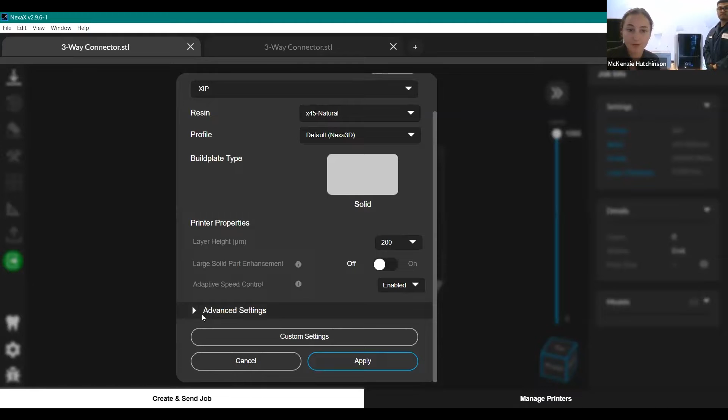Whether you have the Pro version or the basic version of the software, you are going to see this screen. With the Pro or with the basic version, you also have access to some advanced settings right here. So you do have some controls. With that, you have your type of base layer, wait time, and exposure settings. This is good for general use of the printers, in addition to if you're planning on just printing our validated materials at our validated layer heights.

However, if you are looking to print third-party materials or different layer heights, or just get a little bit more into the advanced settings, you have access to custom settings right here with the Pro version of the software. So once I'm happy with all of the settings that I have set, I'm going to go ahead and click apply right here. And it's going to bring me into this interface.

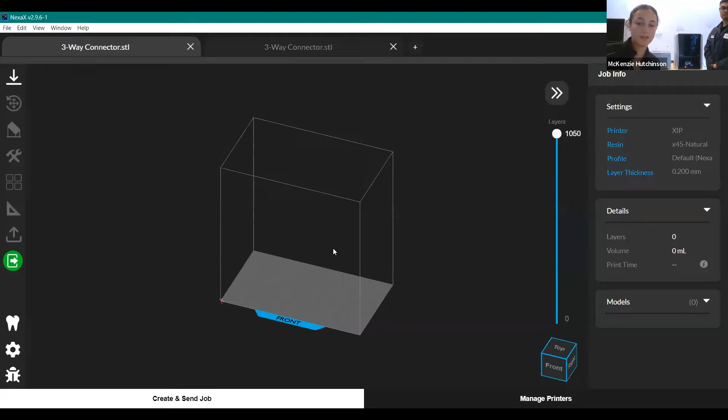So before I can do anything, I need to import my part. As I mentioned, today we are doing a three-way connector print, so that's what I'm going to go ahead and bring in. When you import a model, you have the option to import an STL, OBJ, or 3MF. I typically tend to work with STL, so I'm going to go ahead and click on that.

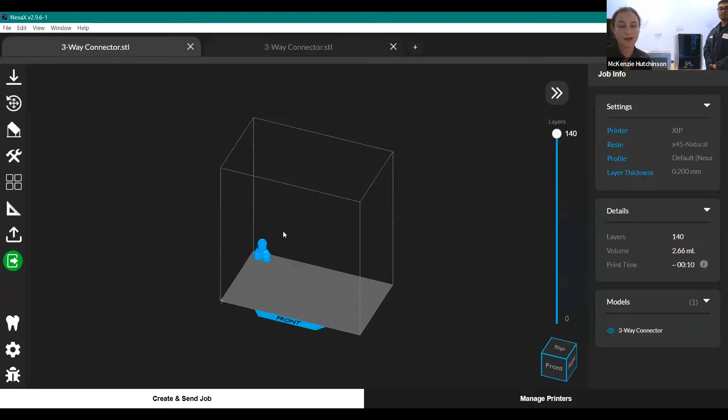And then as you saw on that screen below, it's going to be checking for water tightness. This means that it's going to be checking to make sure that your mesh is intact and ready to print, so there are no holes, flipped triangles, or corrupted mesh. If that was the case, then it would give you the option to repair with the Pro version of the software. So once you're here, you're going to have your part, as you can see right here.

With that, you have some basic transform tools with free translate and also set numbers, along with rotation and scaling. These are also hotkeys here. So let's say you have a workflow and you want to move very quickly, you can do so just by switching quickly with hotkeys. Also, let's say you export your part out of your CAD software with the wrong dimensions, you can modify it here as well. As you can see here, that's going to change it between inches and millimeters.

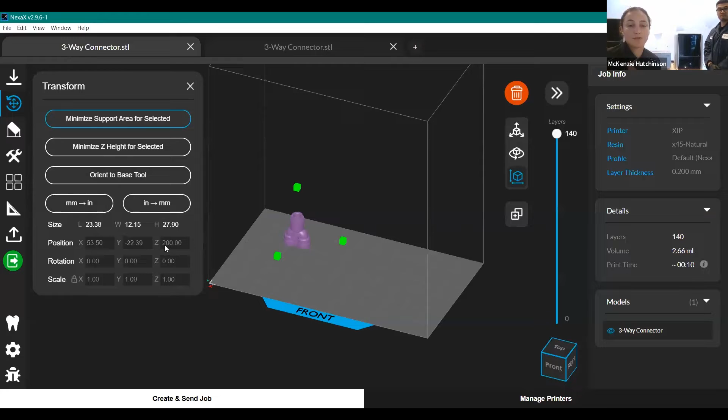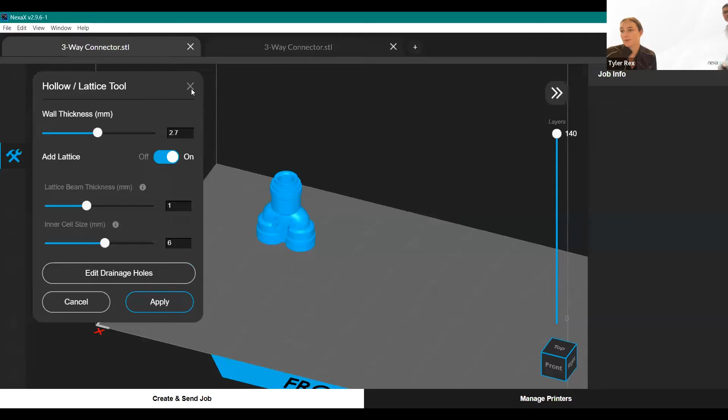With that, you also have some auto-generated orientation options for minimizing the support area or minimizing the Z height. As you see here, this is one of the features that's available with the Pro version of the software, where you can hollow a model if you're printing a very solid model. You can also add a lattice infill and drainage holes, which is something we recommend doing if you are printing a hollow model or a model with an internal chamber.

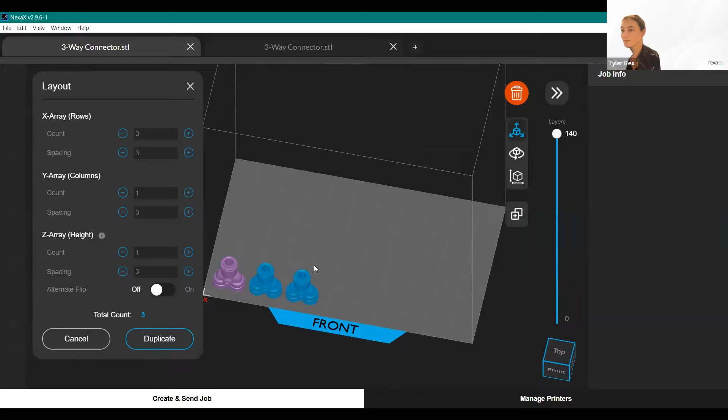The next tool that is useful, especially for this case when you're printing out multiple models, is the duplication array tool. So with that, I can go ahead and duplicate out my parts in X, Y, and Z with a set distance, as you can see here. For this print specifically, we are printing 10 parts. You can fit more on the plate.

With that, you can also do an array up in Z. So you can do that both facing upwards like this, and also alternate flip. I recommend doing your duplication out in a Z stack before generating supports. So this tool is something that's super helpful if you're doing large throughput or high volume prints.

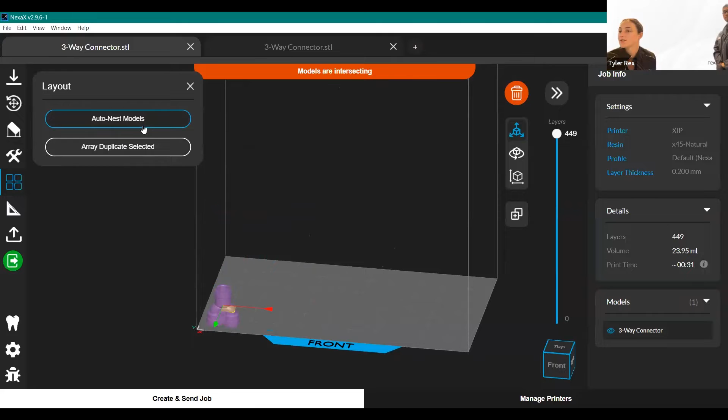And you also have the option to auto nest. So let's say with dental, you bring in a lot of aligner models, and you want to have it auto nested onto the build plate and mapped itself out in terms of orientation so that you don't have to spend the time rotating your parts around to make sure you're getting the most efficient organization. We have an auto nest tool right here, which helps with that as well.

In addition to that, we also have basic analyzing tools such as measuring. So you have 2-point measuring and then also inner and outer diameter. And then once you're there, let's say I'm happy with my print, I can go ahead and save my model. So I'm going to bring this over here.

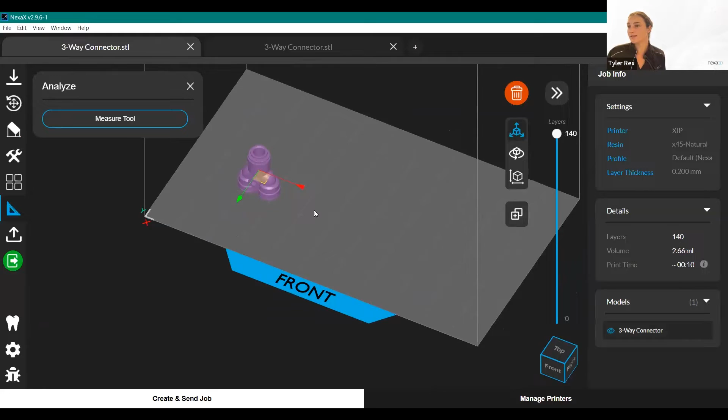And it's going to show you the approximate print time, which is 10 minutes. Once you slice your print, it's going to be a more accurate print time. And then it's also going to show you the volume of your print and then the number of layers as well. So with this print at 200 microns, we can print this part in 10 minutes.

So once I'm happy with my print, I'm going to go ahead and click save. When it saves, it's going to create a build file and a scene file for me. So I'll get into that in 1 second. It looks like our print just finished. So I'm going to have my colleague Eduardo take it out and show you the print, and then we can go ahead and remove the parts from the plate and get them in the wash.

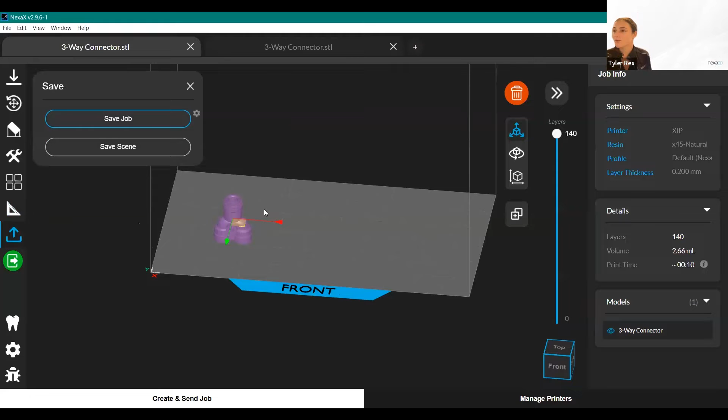So as you can see, we have 10 of the 3-way connectors right here. And then this is in a little bit of an amberish color. It's our X45 natural. As you do continue to do the post-processing, especially the post-cure, it is going to get a little bit more amber, which is something that you will see.

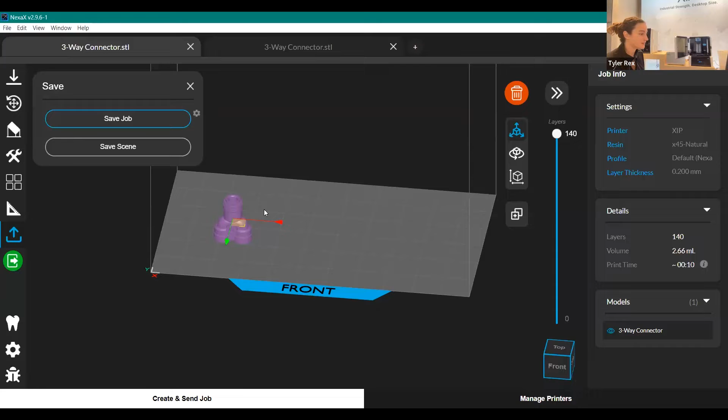So off to the side, I'm gonna have Eduardo remove the parts from the build plate and then put some in the wash. So as you can see here, Eduardo's putting the parts into our XiP Wash Station. This is both the wash and cure station that we use for our XiP printer. As you can see, he has a tub of solvent with a wireframe basket inside, which allows you to wash loose parts or parts directly on the build platform.

He set the timer for a set amount of time. We have pre-validated times and settings for all of our materials that we have validated. And with that, it's going to use a magnetic spinner to agitate the resin.

So this is a little bit different than that of our XWash unit that's associated with our larger industrial printers, in the sense that with that one, you put the parts in at the top and then it's going to lower down into a tub of solvent and then raise back up afterwards. So for this one, you're going to be manually inputting the times every single time, as opposed to that one, where you can have a little bit more pre-validated settings built in.

Okay, thank you. So as that's running, we're going to talk a little bit about the XiP itself and the components of the XiP. So as you see here, this is the XiP that we just ran the print on. The XiP is the smallest of our resin 3D printers. You can print anywhere from 25 to 200 micron layer height. Majority of our materials are validated at 100 or 200 micron layer height, like we printed today.

In addition to that, we have a variety of materials that are validated on this machine. Anything from prototyping materials like we're looking at right now to dental to industrial, and everything in between. With that, as I mentioned, this printer is also open platform. So what that means is that if you purchase the printer and the pro version of the software, you can print your own resin as well. So you are not locked into specifically what we have validated on this machine.

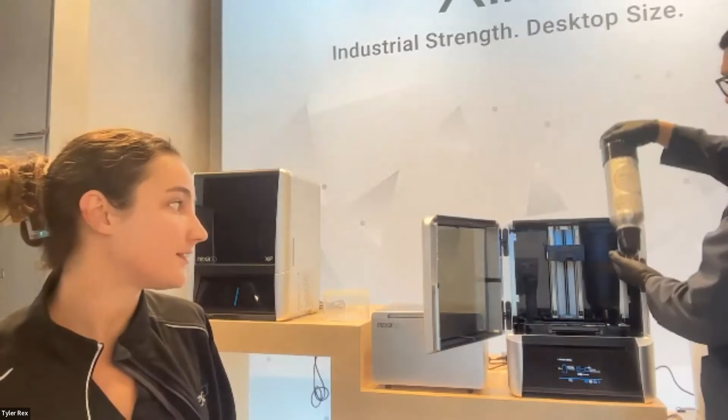Yeah. So this does have a membrane in the bottom, just want to clarify that for everyone. But you'll get to see the features of this. So I'll go have Eduardo show you on the printer itself. So he's going to pull out the cartridge first. So we had a cartridge system already built in, so it's going to be auto dispensing resin as our print was going on. He's going to set that to the side, and then he's going to go ahead and disengage the electromagnets on the XiP.

And with that, he can pull out the entire vat. So there's currently resin in this, so he's not going to tilt it for you. However, as you can see, the membrane is still attached down below. This is the vat itself, and then there's a pour spout. Maybe if you, there we go. There's a pour spout right here. So that's where you can pour the resin out and filter it back into the container.

Yeah, absolutely. And you run a quick clean cycle that's also available on the menu. And it takes probably, what, like 15 seconds total. It'll cure any additional leftover resin at the bottom. And then you peel that off. It's a very satisfying experience. Just peel that extra resin layer off and then move forward from there.

So that is a billet aluminum vat. And on the bottom is what we have, our catch-a-latch system, which if you've ever tried changing membranes with some other printers, we know this is not a fun experience typically. So we have made that as simplified as possible. So it's just 4 latches that hold that membrane into place on the bottom of the vat.

As you know, it is a consumable, it lasts anywhere from 30 to 50,000 layers. So as you get towards the end of life of that membrane, you can have that off and changed in a matter of seconds. This is not some big, long, involved process. I think that's important to point out as well.